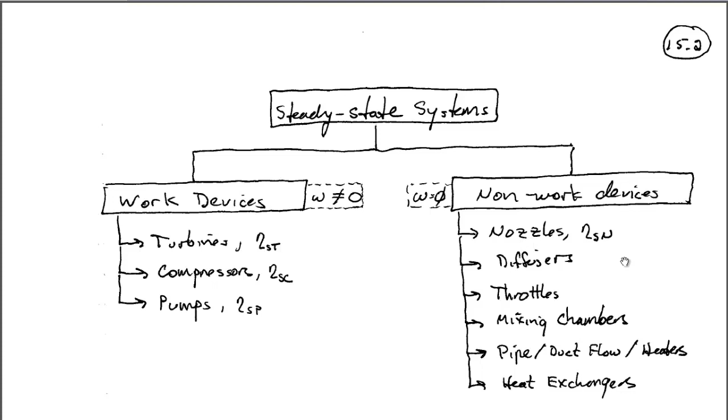We're going to go through each of these different devices, describe what they are, what their purpose is, and how we thermodynamically analyze them. For that analysis, we'll rely on the general steady state first law equation. Because we're doing this for a non-work device, in almost all cases the W dot term in our first law equation will go to 0, okay?

Now you'll notice in parentheses I put usually here. That means you always want to pay attention if there's work transfer. The one way you always know if you have work transfer is if you're able to move something with that process or system. So take, for example, a motor with a spinning shaft - that shaft can move things. You can attach that spinning shaft to a belt and have that belt drive a drill bit, for example. So that's an example of work transfer. Or the motion of a piston in a piston cylinder arrangement is work transfer because that piston can move other things. Or the lighting of your computer screen with electricity.

Again, you're using electricity and exciting photons and so on, but you're still moving things. In transferring useful work, you can get useful work out of that. So don't let that make you nervous that it says usually here. I don't put that in to try and trick you or create a stumbling block on an exam. I put this in so that when you're working as an engineer someday, you don't just blindly cancel this work transfer term if you're studying a steady state device that in fact does have work transfer with it. It's almost always obvious when you have a work transfer associated with your process, but I just put that in for completeness of discussion.

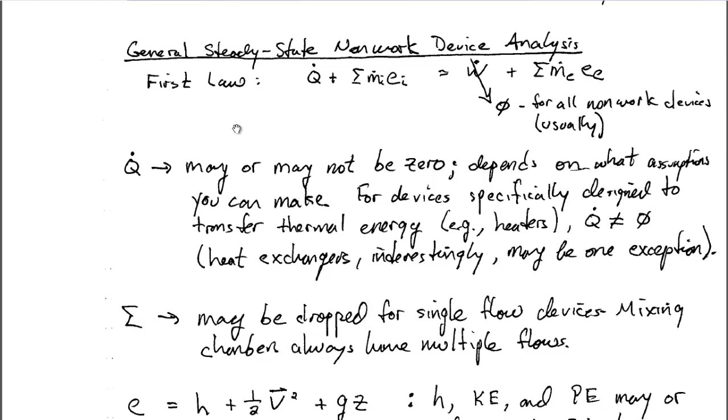So what I've done below here is provide a little summary of what would happen to each of these terms in the first law equation. For the first term, we have Q dot, our heat transfer term. When we're talking about non-work devices, this Q dot may or may not be equal to 0. It depends on what assumptions you can make, and it depends on what kind of device you're analyzing.

So the one rule of thumb that you can safely rely on most of the time, there's just one exception. I don't mean to create all these rules and exceptions for you, but for any device designed to transfer thermal energy, such as heaters, chillers, or condensers, Q dot is not equal to 0. If it's a heater, you're transferring thermal energy from the surroundings to the system, so your Q dot term would be non-zero.

Now, the one exception to this that we're going to spend some time talking about today is a heat exchanger. Actually, the exception with a heat exchanger is only when you draw your control system around the entire heat exchanger, and we'll get to that later. Just know that heat exchangers can sometimes be an exception, where a heat exchanger is purposefully designed to transfer thermal energy, but depending on how you draw your control system, there may be no heat transfer between the system and its surroundings. We'll talk more about that later on.

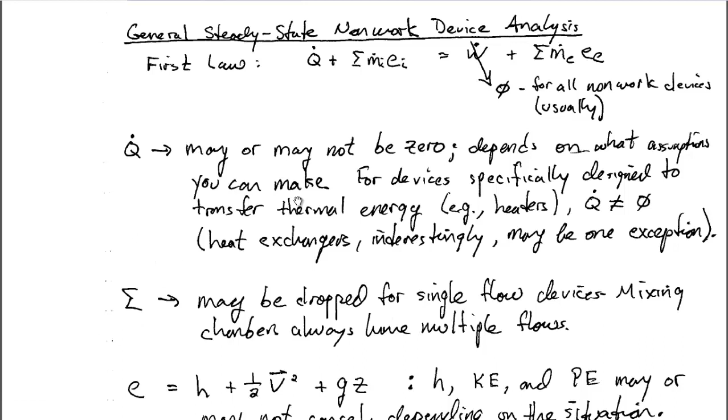But one exception that will almost always be the case is if we're studying a mixing chamber. Mixing chambers always have multiple flows, right? You have to have more than one flow coming in for it to be a mixing chamber. You're mixing two different things, so there has to be multiple flows at least coming in, and you may have multiple flows going out, but for sure you should have multiple flows coming in. So do be careful about just blindly dropping the summation sign when writing your first law equation for non-work devices, especially mixing chambers.

And then, of course, the last term in our first law equation that we can make some general statements about is the energy of the fluid, our E term. Remember that the energy of the fluid is the summation of its enthalpy, and whenever we have flow, we have to use the enthalpy property, not just internal energy. This enthalpy includes the internal energy plus the flow work. So we have the substance's energy given by enthalpy, plus its kinetic energy, 1/2 v squared, plus its potential energy, g times z. Now, enthalpy, kinetic energy, and potential energy may or may not cancel.

So again, when we did work device analysis, we were always able to cancel potential and kinetic energy. But in the case of non-work devices, these terms are not as commonly canceled. So we have to really pay close attention to the situation we're analyzing before we just cancel a kinetic energy or potential energy term.

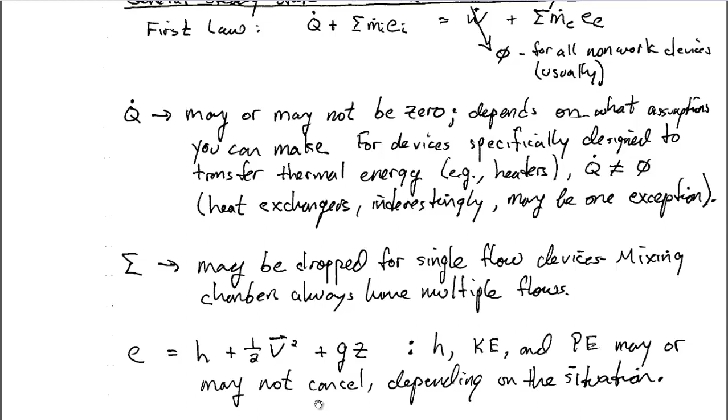Okay, so before we get too far into the details about non-work devices, let me just provide a summary of the work devices for you that we talked about last week.

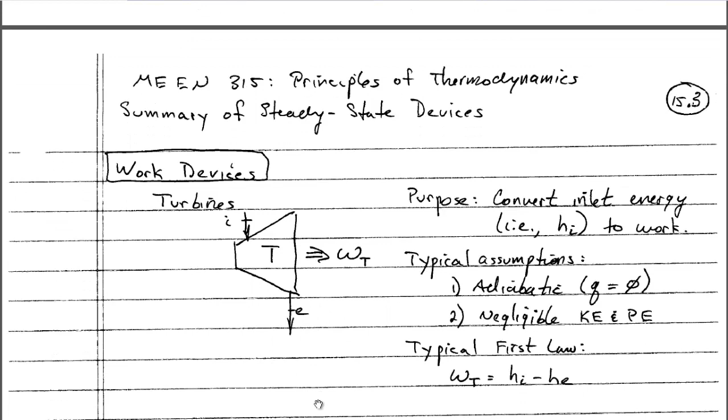So of course we have turbines, and we can make our general statement that there's some flow in and some flow out. For this particular situation, we're saying there's a single flow in and a single flow out, and that it's transferring some work. We're treating it as adiabatic -- I don't have a heat transfer term drawn between the system and the surroundings. We know that the purpose of a turbine is to convert inlet energy, that is the enthalpy of the inlet flow, to work. So the purpose of a turbine is to transfer work energy. As we talked about last week, the typical assumptions we make for a turbine are that it's adiabatic, in other words the heat transfer is equal to 0, and we have negligible changes in kinetic and potential energy. These are typical assumptions, not always, but that's typically how we do our analysis for a turbine. So the first law typically becomes this form here, where it's just the difference between the inlet enthalpy and the exit enthalpy.

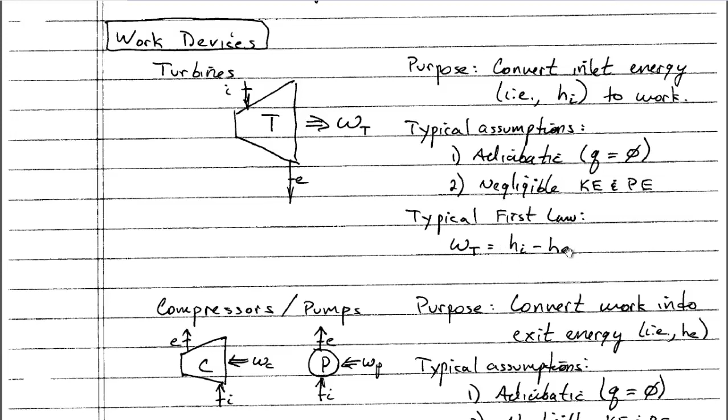We also talked about compressors and pumps, and of course a compressor/pump have the purpose of converting work energy into exit energy. In other words, we put work energy into the system so that we can get a higher exit enthalpy than the inlet enthalpy.

We talked about the difference between a compressor and a pump. A compressor is designed to increase the exit energy of a gas, whereas a pump is designed to increase the exit energy of a liquid.

We can make our typical assumptions for compressor or pump analysis. The first is that we treat it as adiabatic, so heat transfer equals 0, and we typically can neglect kinetic and potential energy. So our first law equation is the difference between the inlet enthalpy and the exit enthalpy, the same equation as the first law for a turbine. But one item to note is that the compressor work or pump work is negative, because the work is going into the control system. So by virtue of the left-hand side being negative, the right-hand side will be negative, which means the exit enthalpy is greater than the inlet enthalpy.

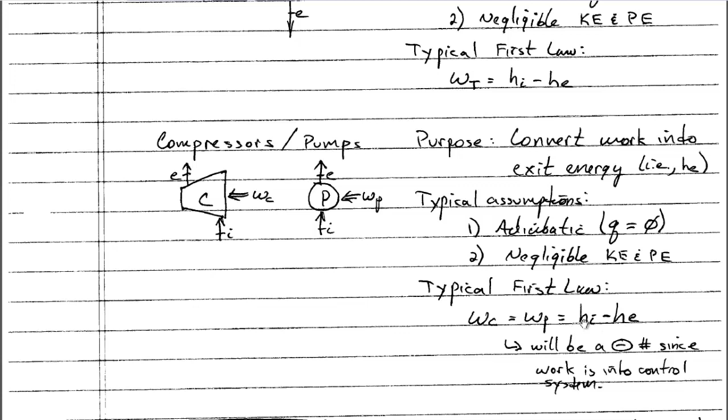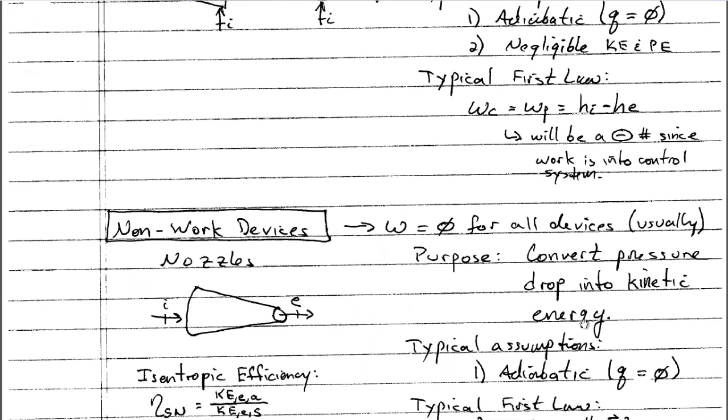That's what we talked about last week, and we defined turbine isentropic efficiency and compressor isentropic efficiency. But now let's shift our attention to some of the non-work devices. The first non-work device we're going to talk about is what we call a nozzle.

We've all had experiences with a nozzle before. If you've ever played with your garden hose and had a nozzle on the end of it that would allow you to squirt water at your mom or dad or the neighbor's dog, that was, in fact, a nozzle. So the purpose of a nozzle, the way a garden hose nozzle works, is that it converts pressure into kinetic energy.

When you put a nozzle on the end of a garden hose, you now have water pressure that's basically contained behind that nozzle. The nozzle has a change in area, and by virtue of that change in area, the pressure provided by the water supply system gets converted into kinetic energy. So you have relatively slow velocity but high pressure coming into the nozzle, and relatively high velocity but low exit pressure leaving the nozzle.

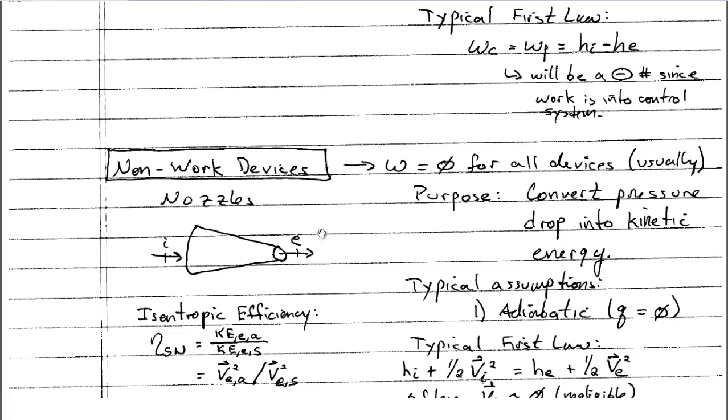In the case of a nozzle, the work transfer is equal to 0, since you're not actually transferring any work, but you are converting one type of mechanical energy, the pressure energy, into a different type of mechanical energy, the kinetic energy leaving the nozzle. Now, before I dig into the assumptions in the first law equation, there's one thing I want to bring to your attention about a nozzle, and that's the change in area.

The way I have this drawn is probably how you'd conceptualize a nozzle, in that the inlet area is greater than the exit area. And that probably makes a lot of sense because you've got slow velocity coming in, and then you neck that area down to a small exit area, thereby using that pressure energy to increase the kinetic energy of that exit flow.

But what's probably not going to feel very intuitive is when I tell you that this design for a nozzle is only true if your flow is subsonic, in other words, less than the speed of sound. If your flow were faster than the speed of sound, or what we call supersonic, the nozzle would in fact have just the opposite area relationships — your inlet area would be smaller than your exit area.

You'd have what is called a diverging design for a supersonic nozzle. So if you ignore the inlet and exit labels here, this would in fact be your inlet side, and this would be your exit side if the flow were supersonic. The key thing though is that the function is still the same — if I call it a nozzle, that means my exit velocity is faster than my inlet velocity. So for supersonic cases, even though my inlet area is smaller than my exit area, my exit kinetic energy is still higher than my inlet kinetic energy.

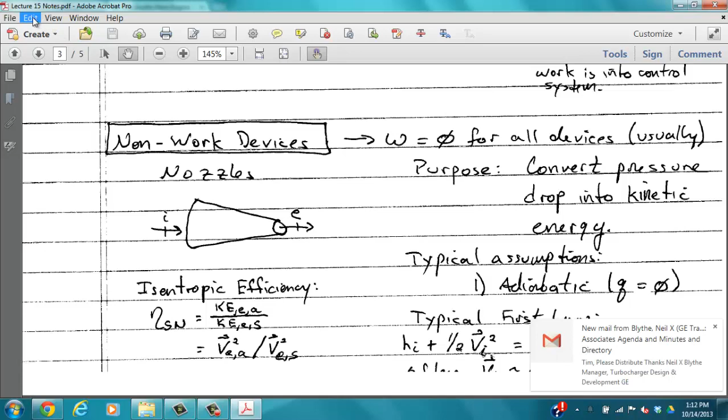And so the way this is drawn here is for a subsonic flow. Okay, so let's make sure we pay attention to that as you continue to design and use nozzles in your career. Okay, so what are the typical assumptions of a nozzle?

Well, first of all, we can always pretty much assume that a nozzle is adiabatic, unless you're told otherwise, or you're dealing with some really high temperature gases or something that would not make it adiabatic, in which case your heat transfer term is equal to 0.

Now, you're dealing with kinetic energy, so you cannot neglect kinetic energy. But you very rarely have any changes in elevation or significant changes in elevation, so you can neglect potential energy.

So your first law basically becomes the following, where you have single flow in, single flow out. So you have your inlet enthalpy plus your inlet kinetic energy, 1/2 VI squared, equal to your exit enthalpy plus your exit kinetic energy. What this says is that this VI squared term is often negligible.

In other words, because you're accelerating your flow through the nozzle device, your exit velocity is usually several times larger than your inlet velocity, sometimes an order of magnitude larger. So you can very commonly neglect this inlet kinetic energy, or inlet velocity — in other words, assume that VI is equal to 0.

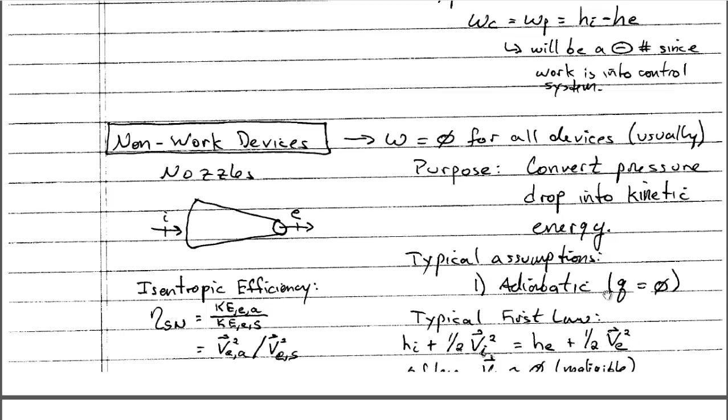And in order to do that isentropic analysis, you would essentially treat this nozzle as being reversible, no entropy generation, and adiabatic, Q equal to 0, then look at how the exit enthalpy for the isentropic nozzle compares to the exit enthalpy for the actual nozzle. Then use your first law equation to come up with an actual exit velocity or an isentropic exit velocity, depending on what information you have and what you have to solve for.

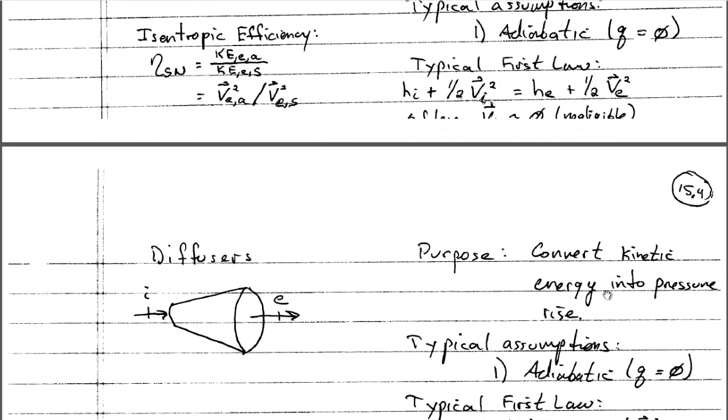Okay, so that's a nozzle, and the next device we'll study is what we call a diffuser. As I mentioned, a diffuser is basically exactly the opposite of a nozzle. A nozzle is designed to convert pressure into kinetic energy. A diffuser is just the opposite, where it converts kinetic energy into pressure.

Now the way a diffuser works is you have this inlet area, and again, this is drawn for subsonic flow. That's very important to note. If it were supersonic flow, it would be the same issue we had with the nozzle, where this would in fact be the inlet side and this would be the exit side. So in the case of a diffuser, the subsonic flow comes into an inlet area that's smaller relative to the exit area.

And the way to think about this is the following: you have this increasing area when you have subsonic flow, and that kinetic energy continues to pack in more and more molecules into this expanding area. So the diffuser, by virtue of this expanding area, is able to take that kinetic energy and decelerate it, filling up this larger and larger area.

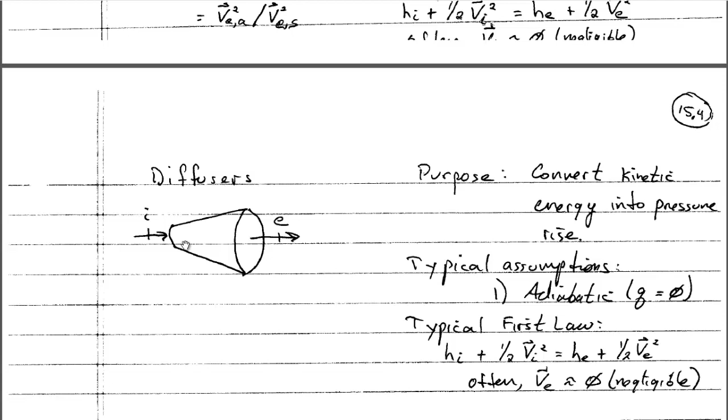Diffusers are sometimes hard to imagine or hard to see, but there's actually two very good examples of diffusers. The one example that's always fun to think about is the inlet diffuser of a jet engine.

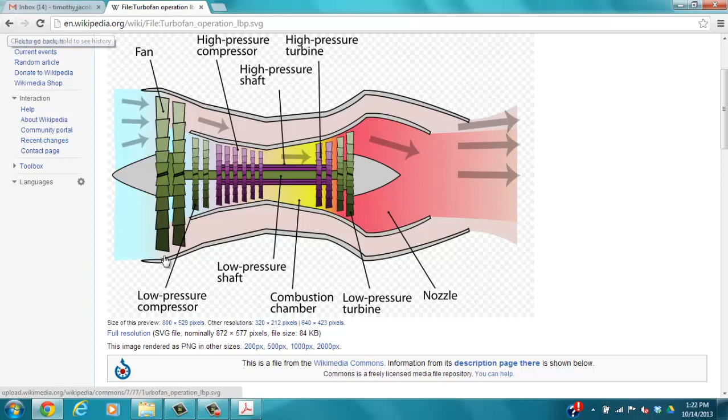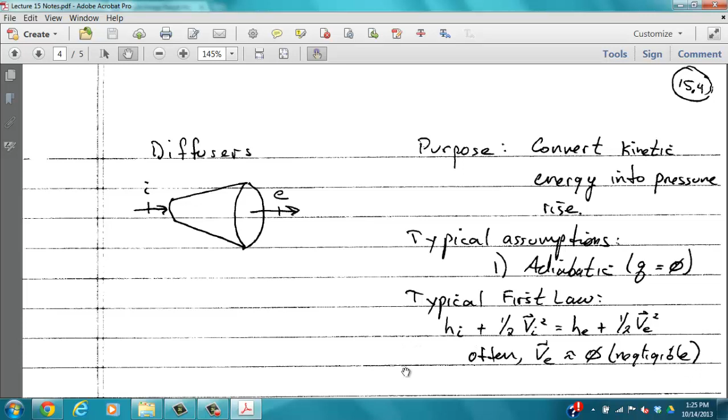Okay, so those are nozzles and diffusers. Now, the next thermodynamic device is what we would call a throttle. Again, this is kind of fun—I can pull up all kinds of crazy images about these things and show them to you. So I'll bring up an image of a throttle, but you probably already know or suspect that a very common application for a throttle is...

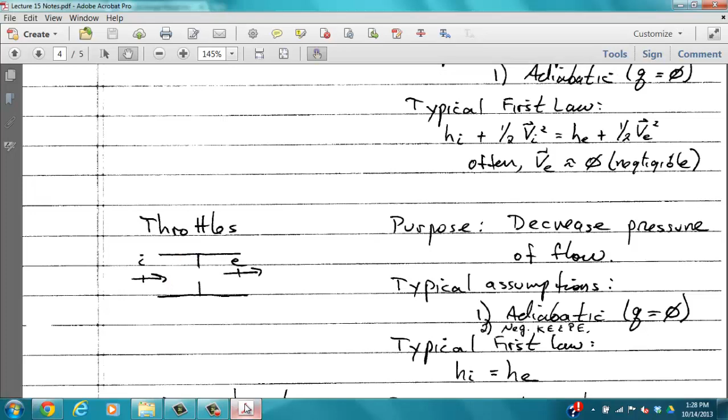But what you can already tell is that the way a throttle works is by restricting airflow. Its function is to restrict flow. So if we go back to the lecture notes, what we see is that a throttle's purpose is really just to decrease the pressure of the flow. We said it's designed to restrict the flow, but it restricts the flow by decreasing the pressure of the flow.

If you imagine this plate that's blocking the flow, the reciprocating pistons in the engine are trying to induct air into the cylinders, so they're putting a vacuum on those throttle plates. But because the throttle plates are closed, restricting that airflow, it creates a vacuum or a pressure decrease across that flow path. So the purpose of a throttle is to decrease the pressure of flow.

So we typically draw a throttle as follows: we have this pipe or passage, and there's a restriction in it. These two little lines represent a restriction or a momentary area reduction. So you have your inlet flow coming in and your exit flow, and of course the inlet pressure is greater than the exit pressure.

The typical assumptions we make are, first, that it's adiabatic, so heat transfer is equal to 0. We also say we have negligible kinetic and potential energy. So when we look at our first law equation, that means a throttle is typically isenthalpic, or constant enthalpy. In other words, the inlet enthalpy is equal to the exit enthalpy.

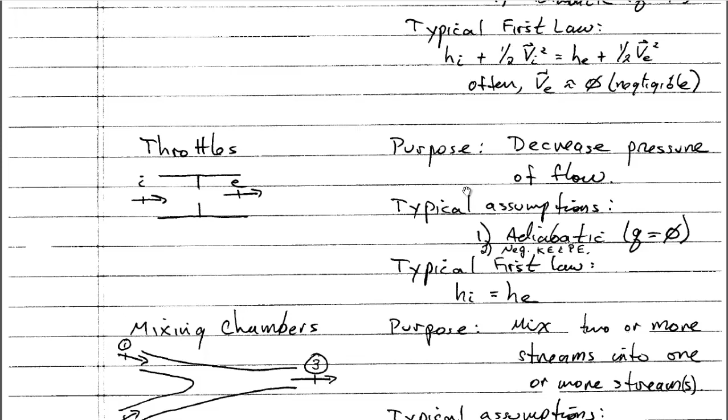What's interesting is that if you have an ideal gas, you know the change in enthalpy is equal to Cp delta T. In this case, the change in enthalpy is equal to 0, since the inlet enthalpy equals the exit enthalpy. So that means the change in temperature of an ideal gas being throttled is equal to 0. That's an interesting point to keep in mind for future information.

The next device we'll talk about is what we call mixing chambers. As you might suspect, the purpose of a mixing chamber is to mix two or more streams into one or more streams. Typically it's two streams merged into a single stream, but there's no reason you might not have n number of inlet streams and n-1 number of exit streams, or you could have more exit streams than inlet streams.

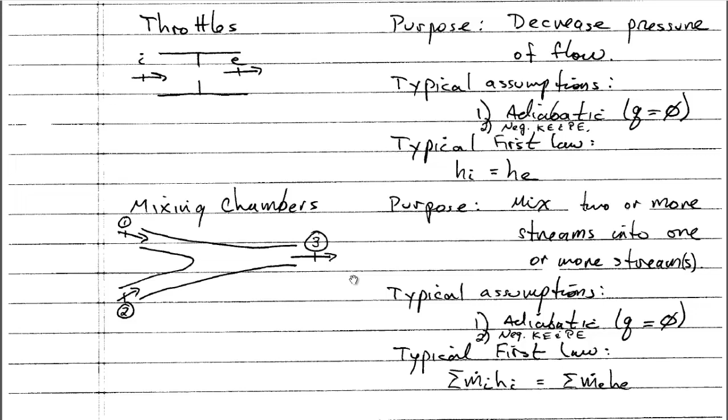That just means you're supplying more than the number of inlet streams you had coming in with the mixed item, or the mixture basically. So our typical assumptions with a mixing chamber are that it's adiabatic, so heat transfer is equal to 0, and we have negligible kinetic and potential energy usually.

So our first law equation becomes the sum of the mass flow rate of the individual inlet streams times their respective enthalpies, equal to the sum of the exit mass flow rates times the enthalpy of the exit flows. So the sum of m dot I hi equals the sum of m dot E he. In the simple example I've drawn, with two inlet flows and one exit flow, the first law equation would be m dot 1 times h1 plus m dot 2 times h2 equals m dot 3 times h3. That's our first law analysis for this mixing chamber.

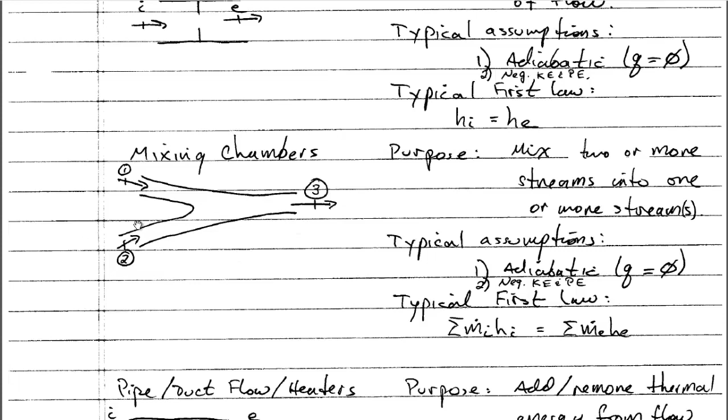So all of the devices we've talked about so far are basically devices that can typically be modeled as adiabatic, or heat transfer equal to 0. Let's now shift our attention to those steady state devices specifically designed to transfer thermal energy. The first category we study is pipe flow or duct flow, and this category also includes heaters, chillers, and condensers, because the analysis is basically the same—even though a length of pipe isn't the same as a heater, it's all very similar conceptually in how we'd analyze them thermodynamically.

So let's suppose that we had a piece of pipe, or we can call this a heater. The function of a heater is to add thermal energy from the surroundings into the system. We have Q dot drawn from the surroundings into the system, and we have an inlet state and an exit state, where the exit state has a higher amount of thermal energy than the inlet state by virtue of adding that thermal energy. So the purpose of pipe flow, duct flow, heaters, chillers, or condensers is to add or remove thermal energy from the system, or what we call the flow.

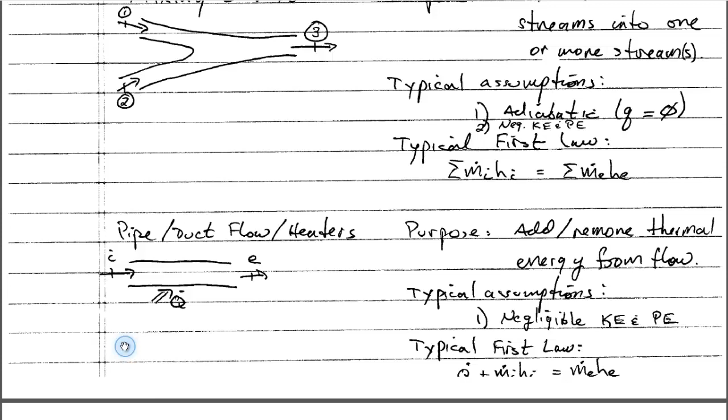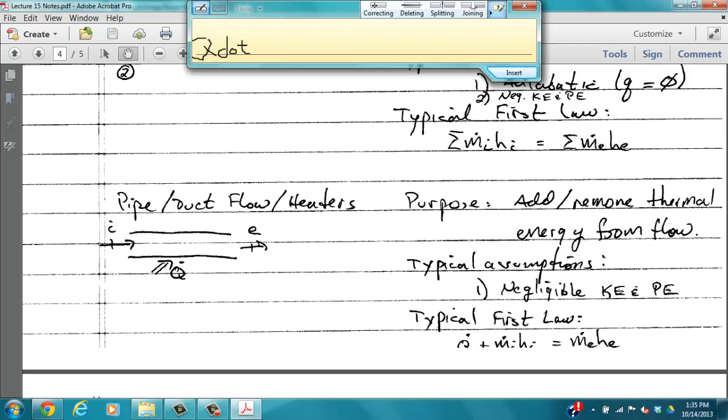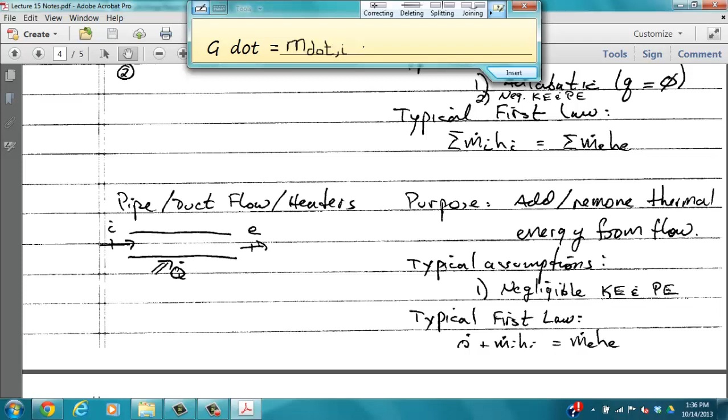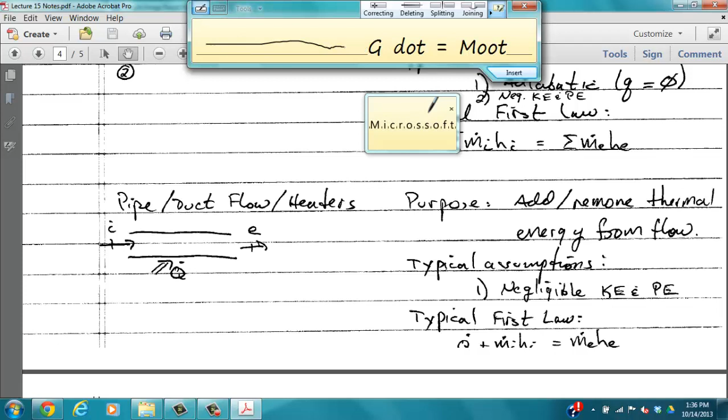If I click on this, and bring this over, and start typing, will this work for me? Here we go. So we will say that this is Q... see if it'll do this for me... dot. Okay, that's supposed to be Q, not G. Is equal to M dot I. Now you know why I write this out ahead of time. That's M dot I, not moot. This is quickly becoming a failed experiment. So before I create any problems here, I'm going to just cross that out and abort.

When we apply the assumptions of negligible kinetic and potential energy, our typical first law is as follows: Q dot plus M dot I times HI is equal to M dot E times HE. When you do the analysis, you should have information to find M dot I, use your property information to find HI and HE, and that lets you solve for Q dot. Or maybe you're given Q dot and have to solve for M dot, whatever the case may be. But it's a single equation, so you can only have at most one unknown to analyze pipes, duct flows, or heaters.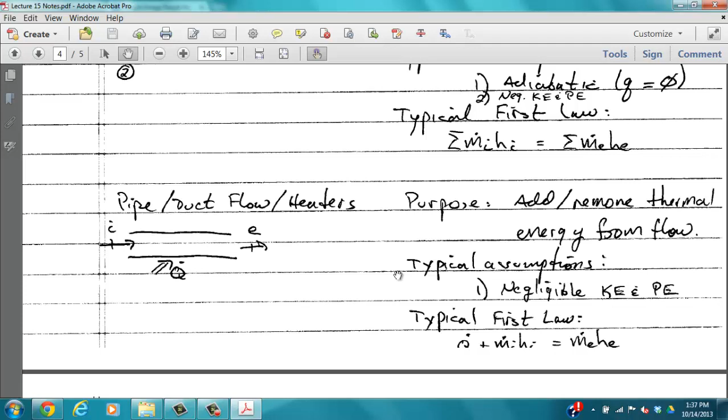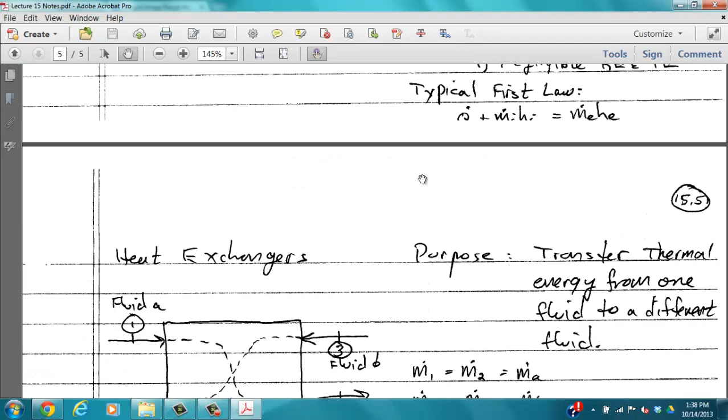The last device we're going to talk about today is what we call heat exchangers. If you remember, we said there's potentially a way to analyze a heat exchanger where it would be adiabatic, or Q equals 0. I'll walk you through that, but first let me specify that the purpose of a heat exchanger is to transfer thermal energy from one fluid to a different fluid. That's very important about the definition. A heat exchanger is not necessarily designed to transfer thermal energy from the system to the surroundings, that would be the case of a heater, chiller, or condenser.

Most heat exchangers are what we call two-fluid heat exchangers, where one fluid comes in, we'll call it fluid A, and flows into the heat exchanger device, flows around, and thermally communicates with a second fluid, which we're calling fluid B. Fluid A may come in at high temperature, and fluid B may come in at low temperature. Fluid A transfers its thermal energy to fluid B, such that fluid A cools down and leaves at a lower temperature at state 2, and fluid B accepts that thermal energy, heats up, and leaves at a higher temperature at state 4.

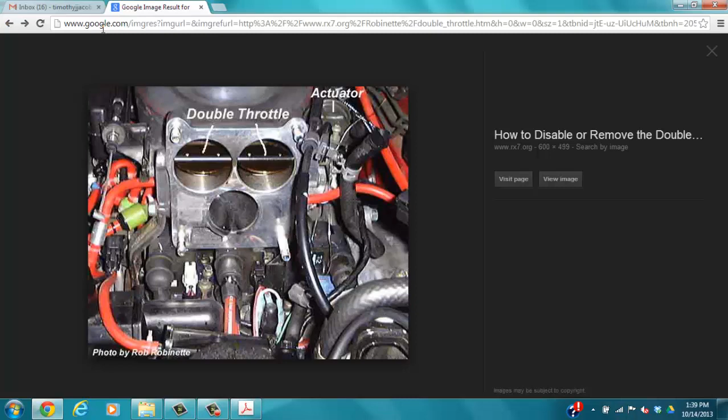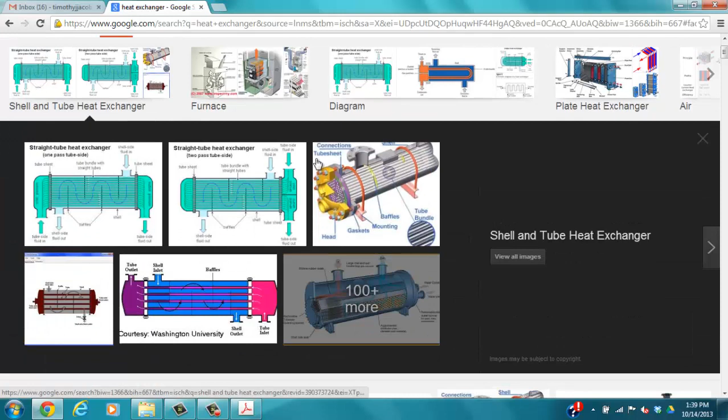Let me see if I can find some good images of heat exchangers for you. So a very common design of a heat exchanger is what is called the shell and tube heat exchanger. In this design you have two fluids, the green fluid and the second fluid, which in this case is the blue fluid. The reason why this is called a shell and tube heat exchanger is because the whole unit, the whole heat exchanger, is made out of a piece of pipe, basically.

And then what's inserted into this pipe are a series of tubes that are connected on both ends by what is called a tube sheet. The tube sheet is basically a plenum, or manifold, that allows one fluid to only flow through the tubes, blocking this green fluid from mixing with the second fluid, which this diagram calls the shell fluid.

So your green fluid flows in and flows through these length of tubes here, the green lines running the length between the two tube sheets. It flows through one of several tubes in this shell and tube heat exchanger, and by flowing through those tubes, your other fluid flows in and flows around the outside of those tubes.

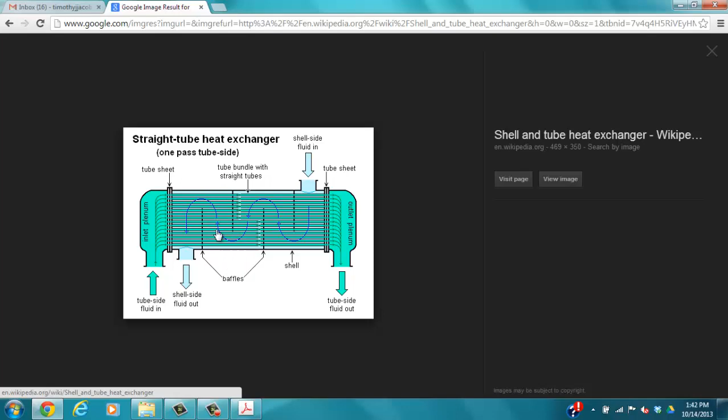So these baffles basically make sure that the fluid on the shell side is flowing the whole diameter of the shell, avoiding the creation of any hot spots in one of your two fluids.

Okay, so this is my replication of a heat exchanger. Fluid A may be the shell fluid, for example, and fluid B may be the tube fluid. But the point is that the two are able to thermally communicate with each other and exchange thermal energy from the hot fluid to the cold fluid.

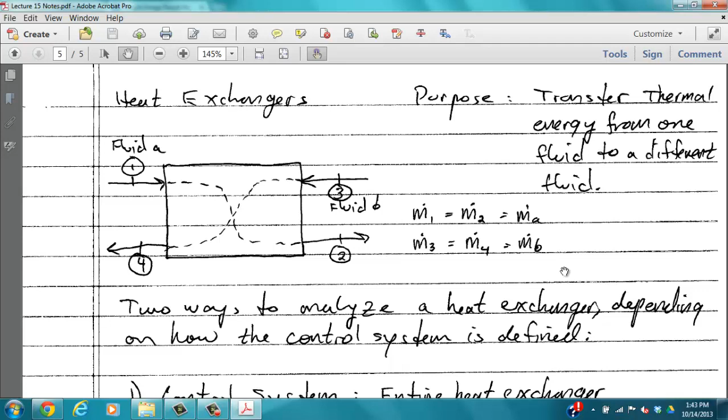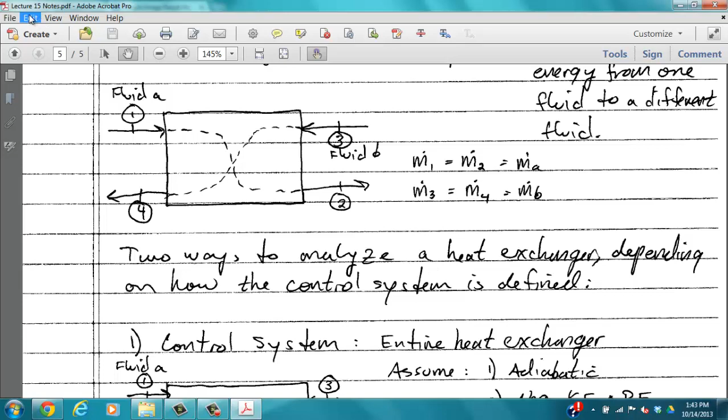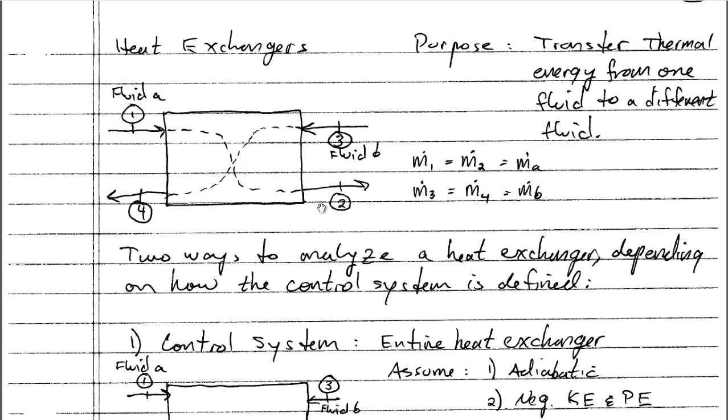Now there's two ways to analyze a heat exchanger, depending entirely on how we define the control system. If we define the control system as the entire heat exchanger, if I draw my dashed line around the entire heat exchanger, that is the case where I can consider the heat exchanger to be adiabatic. In other words, the thermal energy transfer takes place inside the heat exchanger, between fluid A and fluid B, so the heat exchanger isn't necessarily designed to transfer thermal energy from either fluid to the surroundings. Drawing your control system around the entire heat exchanger captures the fact that this could in fact be an adiabatic control system.

So if you say the entire heat exchanger is your control system, then it becomes an adiabatic system, or can be modeled as one. As you might expect, we're able to neglect kinetic and potential energy. So our first law becomes the following: our Q dot is gone because it's adiabatic, and our W dot is gone because it's a non-work device.

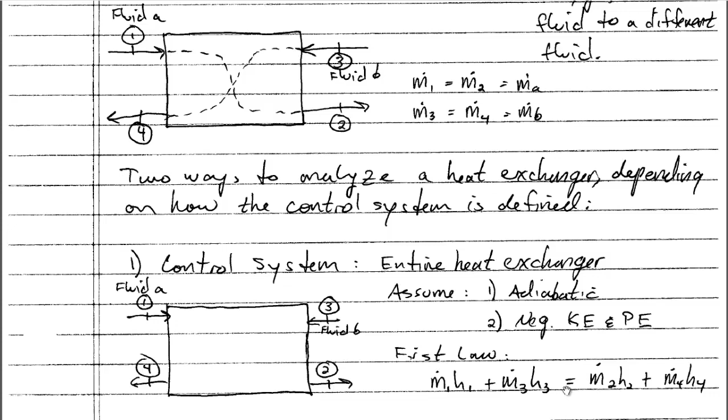And so the first law says that m dot 1 times H1 plus m dot 3 times H3, this is the inlet energy of fluid A, and this is the inlet energy of fluid B, is balanced by the energy that flows out: m dot 2 H2 plus m dot 4 H4, where m dot 2 H2 is the exit energy of fluid A, and m dot 4 H4 is the exit energy of fluid B.

Now, when you draw your control system around the entire heat exchanger, this is actually not very helpful. It means you have to know information about both flow rates, m dot of fluid A and m dot of fluid B, and you have to have property information for 3 of your 4 states. Perhaps you use this equation to determine your 4th unknown state, or maybe you have all 4 states fixed and need to determine your mass flow rate of fluid A, or the ratio of flow rate A to flow rate B, or something like that.

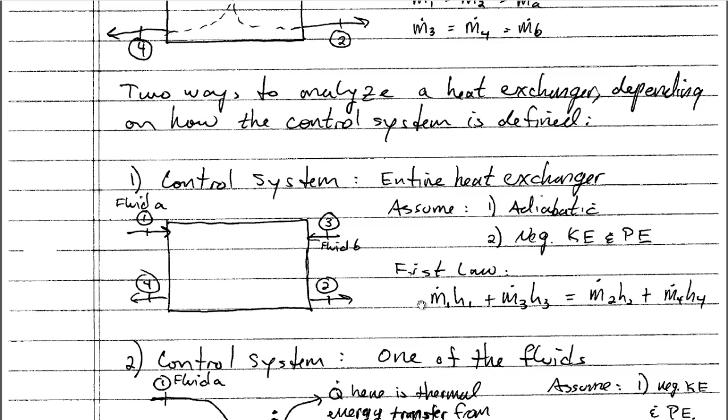That's really the only time that this first law equation drawn around the entire heat exchanger is ever really helpful. If you want to know details about the thermal energy exchange between the two fluids, then you can't draw your control system around the entire heat exchanger.

Remember that the moment you draw your control system, what you're basically saying is you don't really care about how the control system is changed. You don't care about those details inside the control system. That's why you've drawn your control system that way, to not need to capture those details.

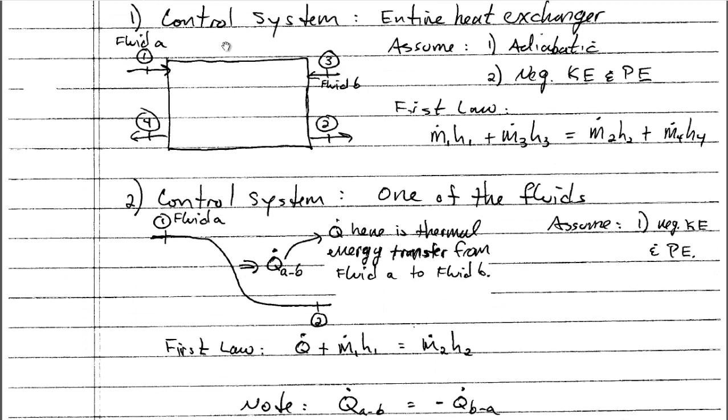So that brings in the second way to analyze a heat exchanger, and that is to draw your control system around just one of the fluids. That's the second analysis here.

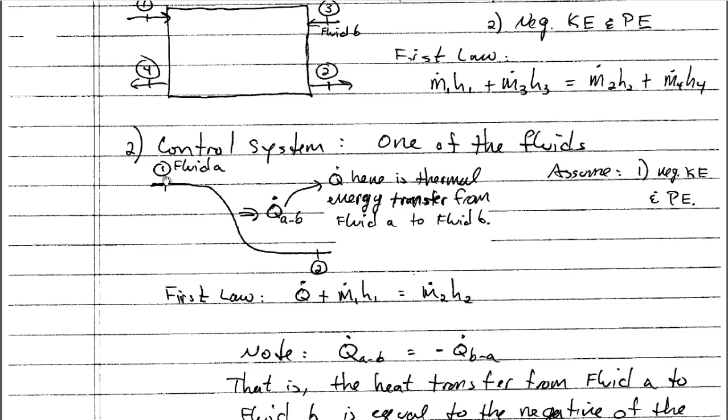So now we're drawing our control system around one of the fluids, and just for convenience, I said I'll draw my control system around fluid A. So fluid A, going back to this picture, enters at state 1 and exits at state 2.

So again, we can assume negligible kinetic and potential energies, but we can no longer assume adiabatic, because it is in fact designed to transfer that thermal energy. So our first law equation then becomes the following.

It looks just the same as the first law equation for a heater, where we have the heat transfer rate Q dot plus the energy in rate m dot 1 times H1, which is equal to m dot 2 times H2. So for fluid A, if you know the mass flow rate m dot 1, which is the same as m dot 2, and you know your inlet and exit property information H1 and H2, then you can calculate what the thermal energy transfer rate is between fluid A and fluid B.

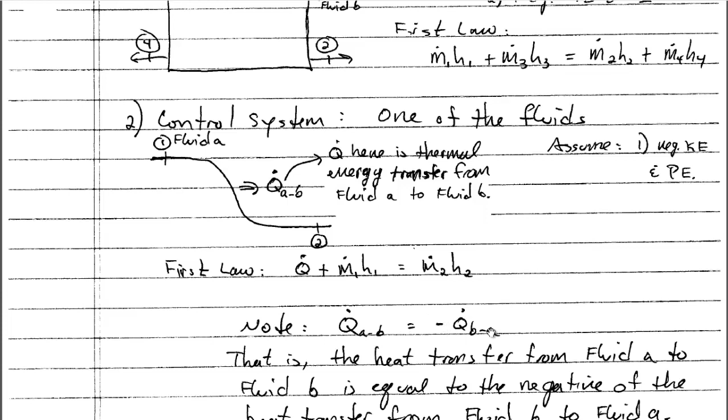Now, once you know that Q dot, all of that thermal energy is transferring from the system, fluid A, into the surroundings, fluid B. So what that means is that if we call this Q dot A to B, that Q dot A to B is exactly the negative of the heat transfer that's being absorbed by fluid B from fluid A. In other words, Q dot A to B is equal to negative Q dot B to A. That is, the heat transfer from fluid A to fluid B is equal to the negative of the heat transfer from fluid B to fluid A.

Okay, so that's basically a snapshot of our steady state devices, steady state non-work devices. And again, it seems like we've gone over a lot of details here, but really the only thing you need to remember about steady state devices are what their purpose is, what their function is, and what are the standard assumptions that we make about these steady state devices. If you can get yourself that far, you'll be able to modify your first and second law equations.

We didn't go over the second law equations here, largely because we would use the second law to either fix an exit state if we were doing isentropic analysis, or to help us calculate entropy generation if we wanted to determine if a process were reversible, irreversible, or possible, for example. But once you know what the purpose of the device is and what the standard assumptions are, then you can modify your first and second law equations for these various devices and proceed to do your analysis. In other words, there's no benefit or need to memorizing these specific equations for all of these devices.